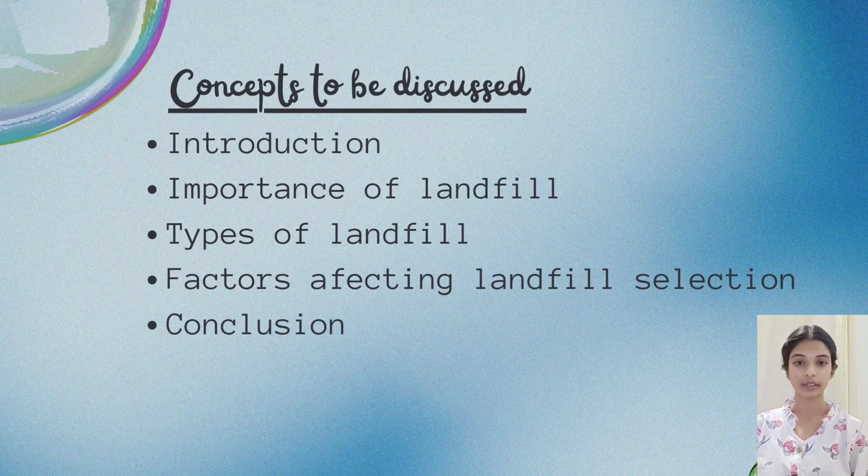Introduction. A landfill system is a cornerstone of modern waste management systems, providing a means to dispose of the vast quantities of waste generated by human activities. Essentially, landfills serve as a designated area where solid waste is deposited, compacted, and covered with soil or other materials to minimize environmental impacts. This method has evolved over time to incorporate engineering controls aimed at mitigating pollution and health hazards.

Landfills typically feature liners and leachate collection systems to prevent contaminants from seeping into surrounding soil and water sources. Furthermore, modern landfills often include systems for capturing methane gas produced by decomposing organic waste, turning it into a valuable energy resource. Despite these advancements, landfills remain a less preferred waste management option compared to recycling and composting due to their long-term environmental consequences. Effective landfill management requires careful site selection, stringent regulations, and ongoing monitoring to safeguard public

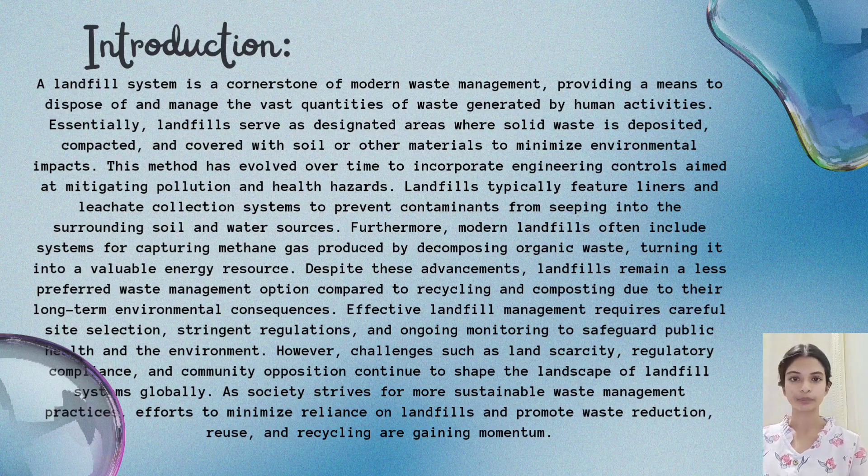Importance of landfills. Landfills play a crucial role in managing the disposal of solid waste, providing a controlled environment for the containment and decomposition of trash. They serve as essential infrastructure for handling the vast quantities of waste generated by human activities, helping to prevent the spread of diseases and environmental contamination. Landfills are particularly important in urban areas where space for waste disposal is limited, offering a centralized solution for waste management. Additionally, landfills contribute to the reduction of greenhouse gas emissions by capturing methane, a potent greenhouse gas produced during waste decomposition.

Properly managed landfills also support the circular economy by serving as repositories of materials that can potentially be recycled or recovered in the future. While landfills are a valuable component of waste management systems, efforts to minimize waste generation and promote alternative disposal methods like recycling and composting remain essential for long-term sustainability. Overall, landfills provide critical infrastructure for society's waste management needs, balancing environmental protection, public health, and resource conservation.

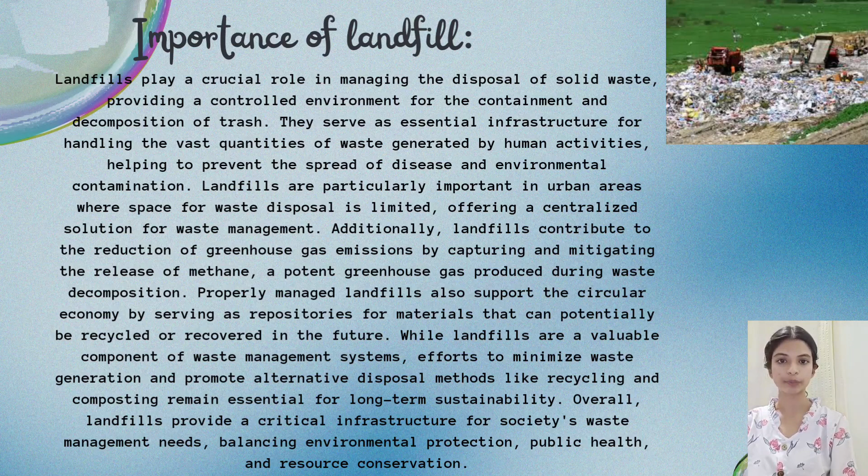Types of landfills. There are several types of landfills, each designed to address specific waste management needs and environmental considerations. Here are some common types. Sanitary landfills. These types of landfills are engineered facilities designed to minimize environmental impacts and protect public health. They typically feature liners at the bottom to prevent leachate, which is a liquid produced as waste decomposes, from contaminating groundwater. Sanitary landfills also have systems for collecting and treating these liquids and capturing methane gas produced by the decomposition of waste.

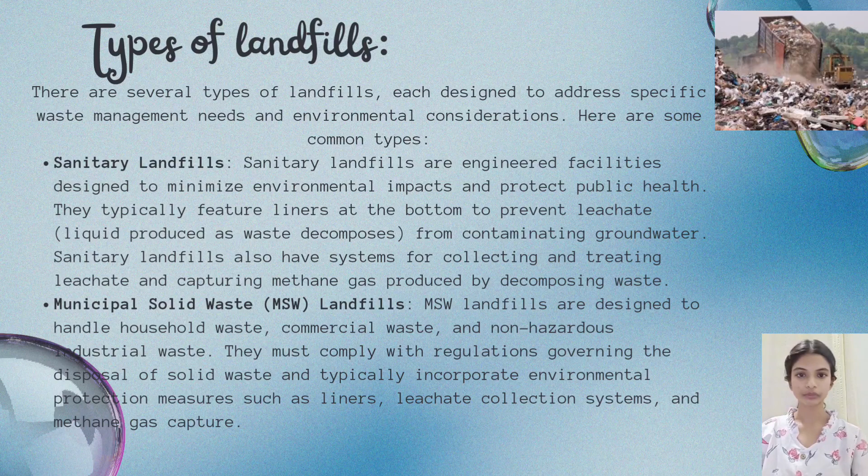Municipal solid waste landfills. These landfills are designed to handle household waste, commercial waste, and non-hazardous industrial waste. They must comply with regulations governing the disposal of solid waste and typically incorporate environmental protection measures such as liners, leachate collection systems, and methane gas capture. Construction and demolition landfills. C&D landfills are specifically for waste generated from construction, renovation, and demolition activities. They may have different design requirements compared to municipal solid waste landfills depending on the types of materials accepted and local regulations.

Industrial landfills. Industrial landfills are used for disposal of non-hazardous waste generated by industrial processes. They may require additional environmental controls and monitoring due to the potentially higher concentrations of contaminants present in industrial waste streams. Hazardous waste landfills. Hazardous waste landfills are specifically designed to handle and contain hazardous materials that pose a risk to human health and the environment. These facilities must meet strict regulatory requirements for waste containment, monitoring, and emergency response.

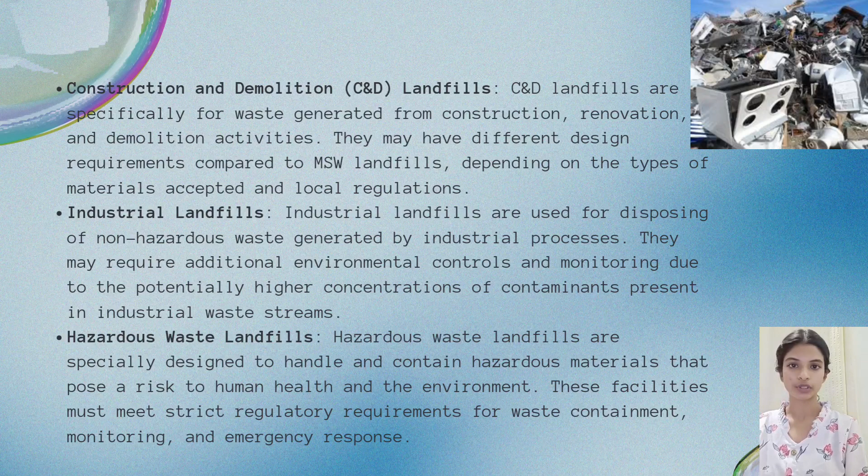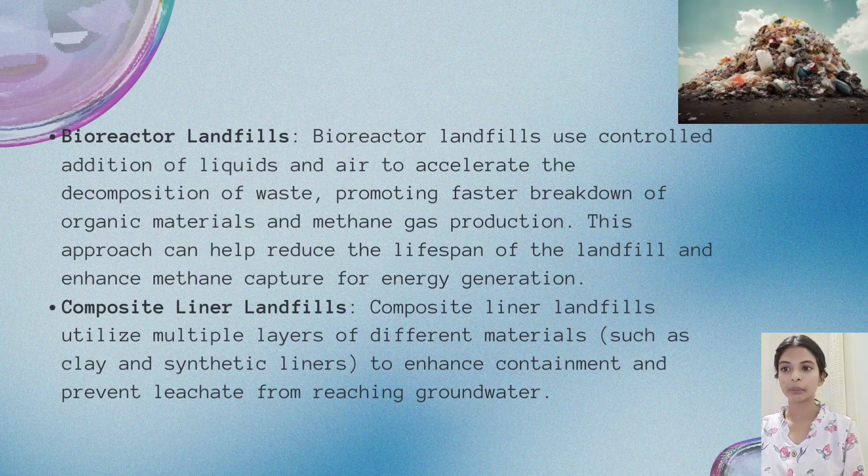Bioreactor landfills. Bioreactor landfills use controlled addition of liquids and air to accelerate the decomposition of waste, promoting faster breakdown of organic materials and methane gas production. This approach can help reduce the lifespan of the landfill and enhance methane capture for energy generation. Composite liner landfills. Composite liner landfills utilize multiple layers of different materials such as clay and synthetic liners to enhance containment and prevent leachate from reaching underground water.

Factors affecting landfill selection. Selecting an appropriate landfill site involves considering various factors to ensure environmental, social, and economic sustainability. Here are some key factors that influence landfill selection. Geological and hydrological conditions. The site should have stable geological conditions to support landfill infrastructure and prevent slope instability. It should also be located away from groundwater sources to minimize the risk of contamination. Distance from population centers. Landfills should be situated at a sufficient distance from residential areas to minimize odor and noise nuisance and reduce potential health impacts on nearby communities.

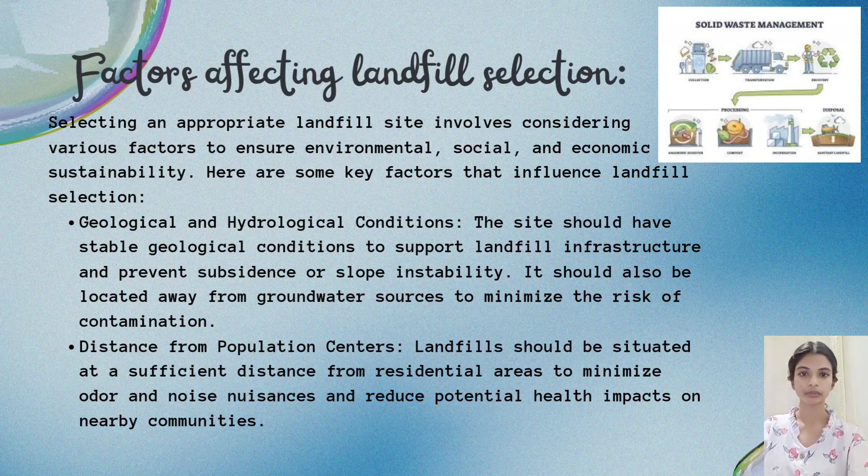Land availability and ownership. Sufficient land should be available for the landfill, and ownership or access rights should be secured to ensure long-term operation. Legal and regulatory considerations regarding land use and ownership must also be addressed. Accessibility and transportation infrastructure. Easy access to the site via roads or other transportation infrastructure is essential for waste collection and disposal. This helps minimize transportation costs and environmental impacts associated with hauling waste over long distances.

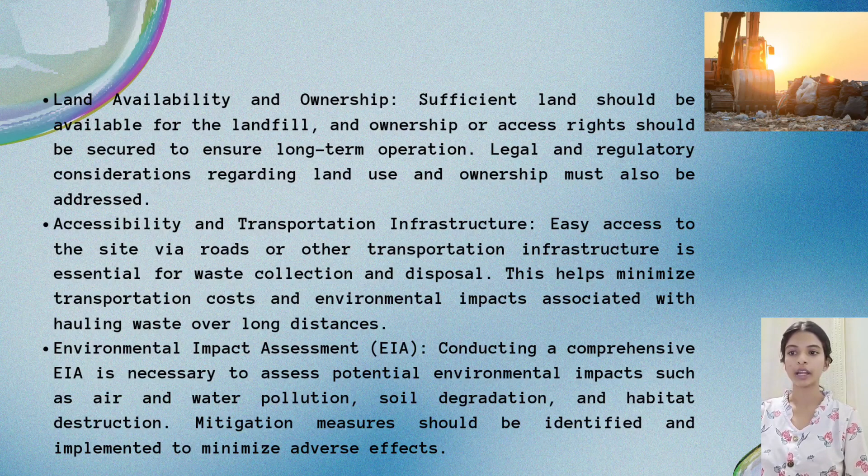Environmental impact assessment. Conducting a comprehensive EIA is necessary to assess potential environmental impacts such as air and water pollution, soil degradation, and habitat destruction. Mitigation measures should be identified and implemented to minimize adverse effects.

Last part of this topic, conclusion. In conclusion, the selection of a landfill site is a complex process that requires consideration of numerous factors to ensure environmental protection, public health, and long-term sustainability. Geological, hydrological, and social considerations must be carefully evaluated to mitigate risks and conflicts associated with landfill development. Additionally, adherence to regulatory requirements and comprehensive environmental impact assessments are essential to obtain legal approval and community support for the project.

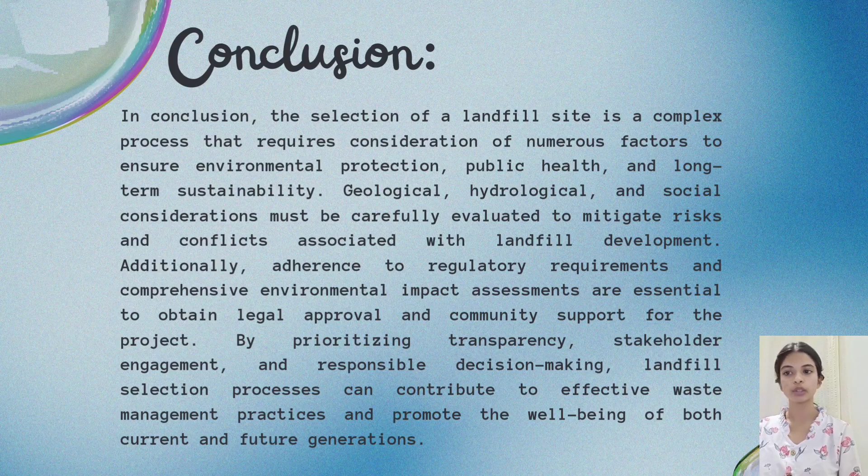By prioritizing transparency, stakeholder engagement, and responsible decision making, the landfill selection process can contribute to effective waste management practices and promote the well-being of both current and future generations. This was the brief information on landfills and factors affecting landfill selection.